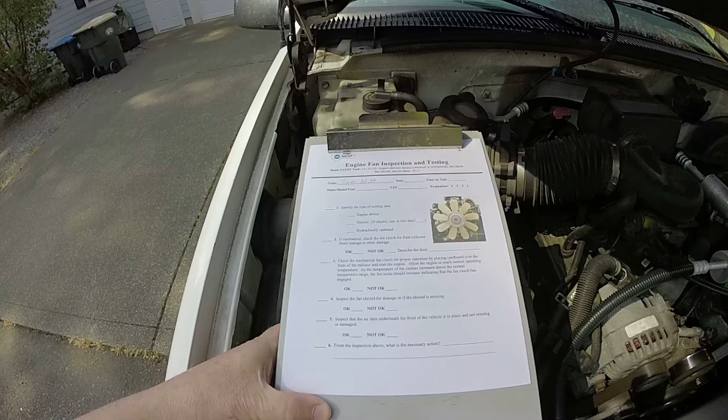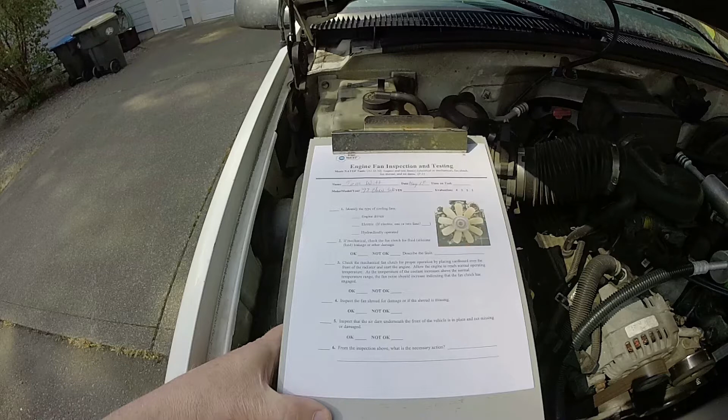Okay, this is inspecting the cooling fan, and this is the worksheet that I've put up on Canvas for you to download. So we're going to start just by filling this out. We're going to be looking at my POS vehicle here, and today's date is May 1st. Can't believe we're in May already. All right, so this is going to be a 1997 Chev Suburban. I'm not going to worry about putting the VIN number down. And the evaluation is for, usually when I grade these things, that's the evaluation marks that I use, but we're not going to worry about that.

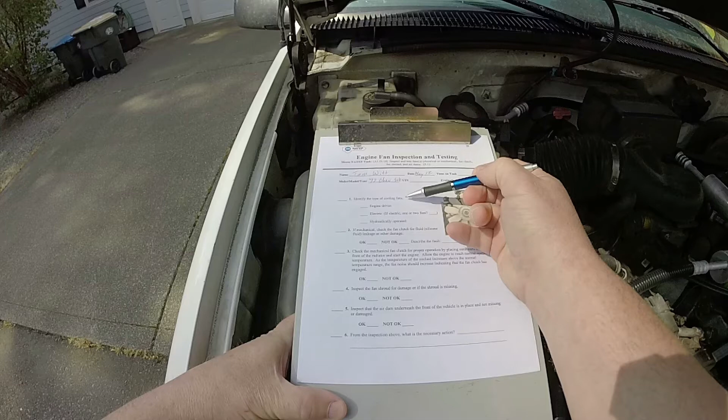So basically what we're going to do is go through and identify all 6 of these items. First, we need to identify what type of cooling fan we have, and if it's mechanical, whether or not the clutch works, and check the mechanical fan for proper operation by placing cardboard over the front of the radiator, starting the engine, and allowing it to reach operating temperature. As the temperature increases, the fan noise should increase as well. So we're going to do that along the way here.

We're also going to inspect the cooling fan shroud to see if there's anything that needs to be attended to, and then inspect the air dam underneath the vehicle, and also determine from the inspection above if any necessary action needs to take place. So that's kind of the outline of what we're going to do.

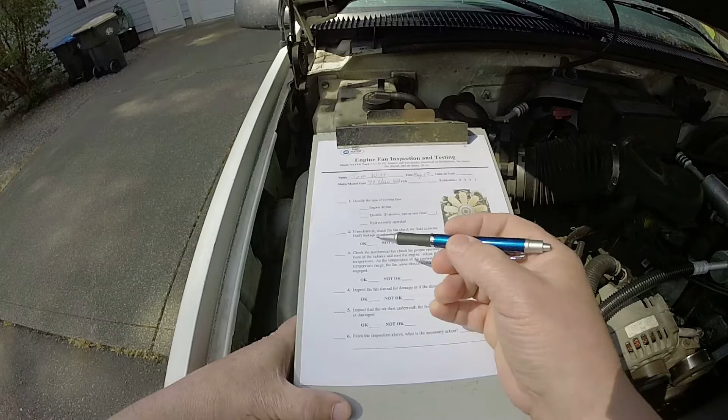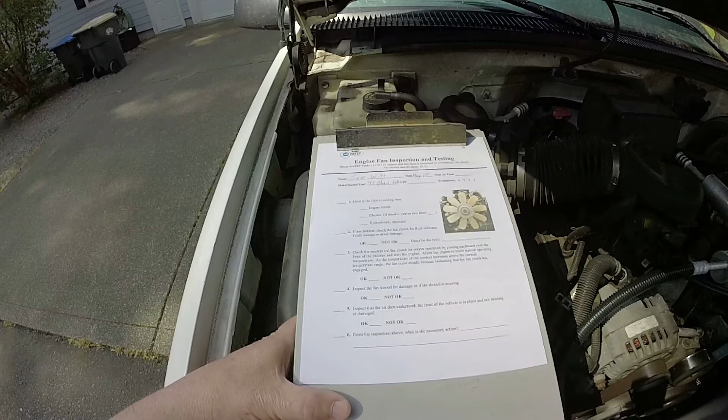Now actually I would put this one down here at the bottom. I'm going to go through and do an inspection on everything first, and then I'll start the vehicle up and make sure that the fan is actually working. So with that said, let's go ahead and take a look at the vehicle.

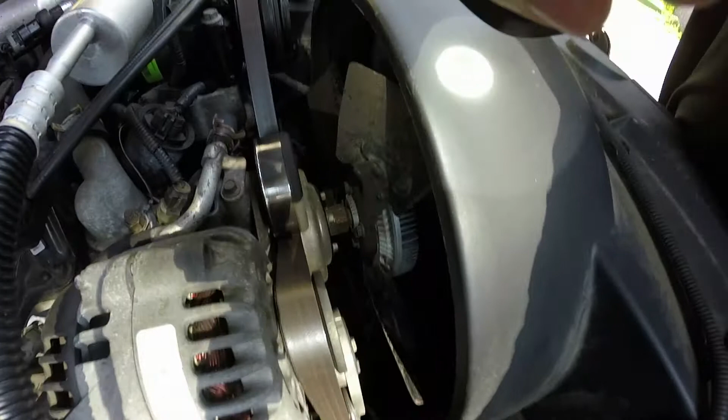Okay, so we're looking at the cooling fan here. If I get my camera adjusted. This is actually a mechanical fan, so it's not driven by electricity, it's driven by the engine itself. Just looking at it right here, I think I showed you on the engine walk-around video, if you did that one, the engine component location video. This silver thing right here that I've got my flashlight pointing to, that is your clutch for the fan. Now, before you start the vehicle up, the engine's cold.

One of the things that you should check is to make sure that the fan actually turns. Now, it shouldn't spin free. If you notice, I spin it like that and it only spins a little bit - that's the way it's supposed to be. Now, if you take the fan and spin it and it just spins freely, that's a worn out clutch. So this one here is actually working the way it's supposed to, at least right now while it's cold.

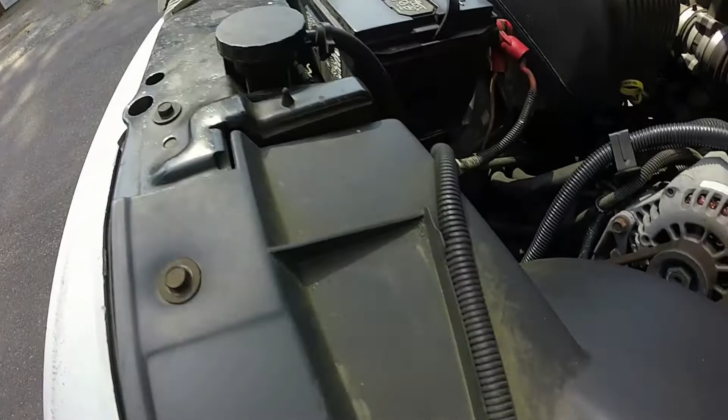We're also going to take a look at the fan shroud. You can see the camera shadow there. We're going to look at the fan shroud, and I don't see any cracks or anything. All the screws are still there in the fan shroud, so everything looks good as far as this fan shroud goes.

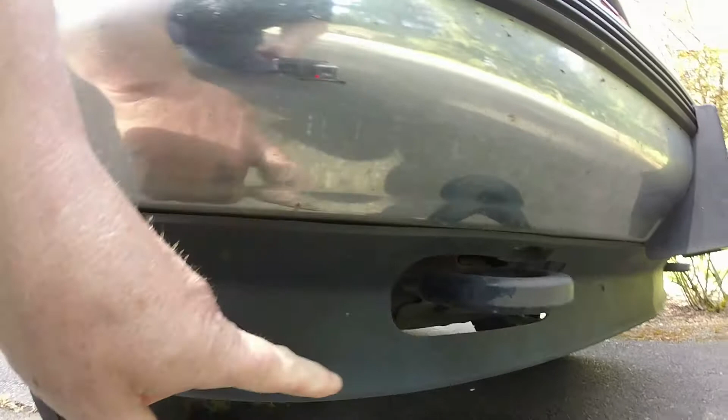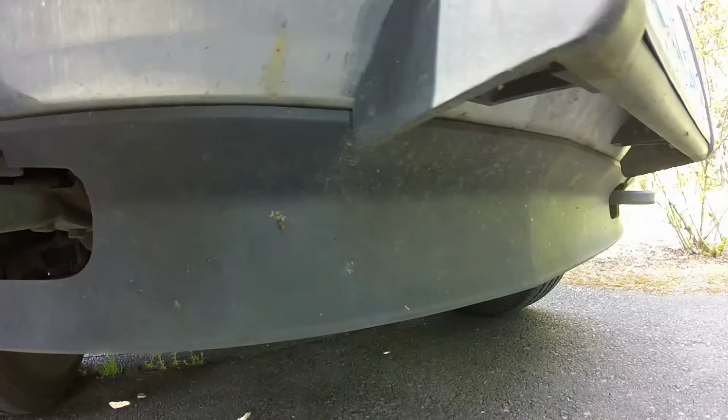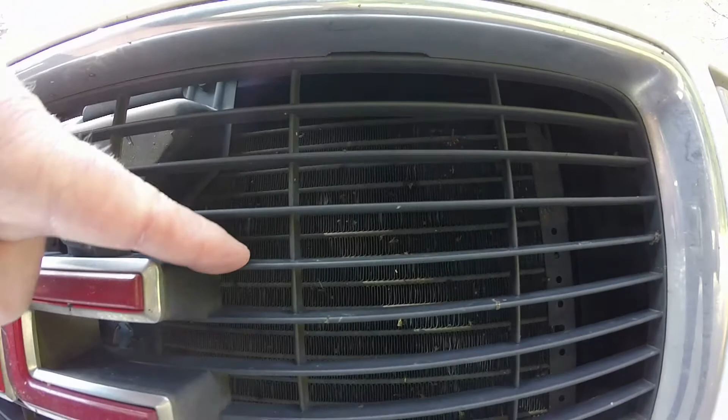Next thing we're going to do is look at the air dam. The air dam is this little guy right here, and on this Suburban, the air dam that's all it is. There are some vehicles that actually have a little more intricate air dam, but as we walk along here, we're going to make sure that it's all there and it's not broken. What that does is it helps channel the air into the radiator. If you look right up here through the grill, you can see the air conditioning condenser, and the radiator is just behind that. The air dam helps channel the air up through so that it goes where it's supposed to on the radiator.

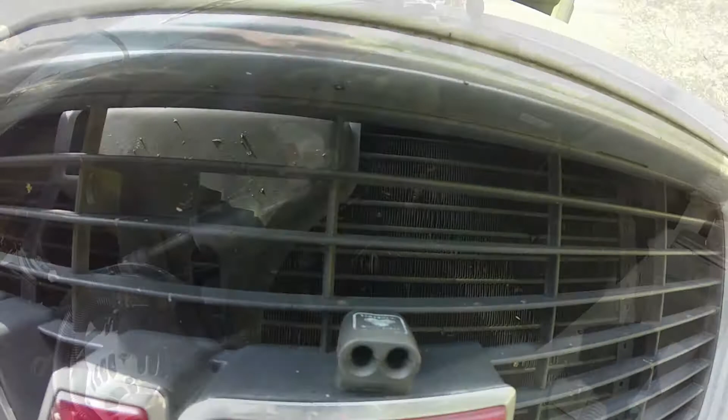I've got the engine started, and we're going to bring it up to operating temperature. So it's still pretty cold right now.

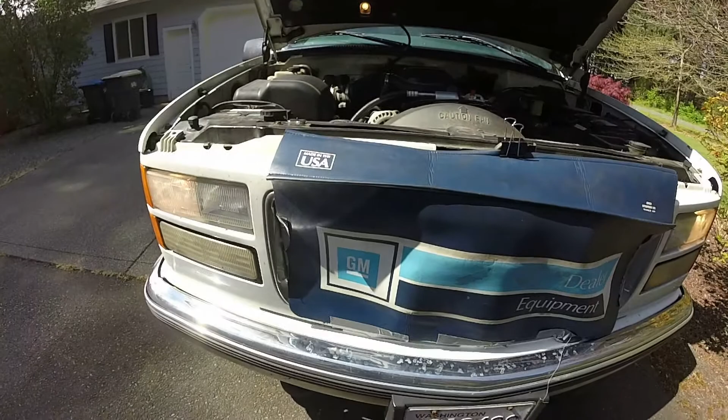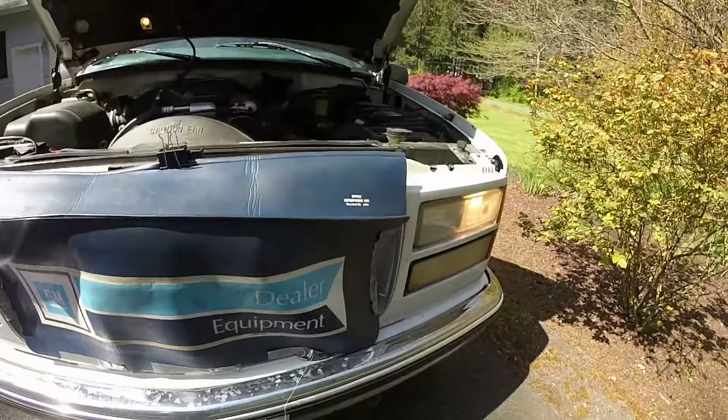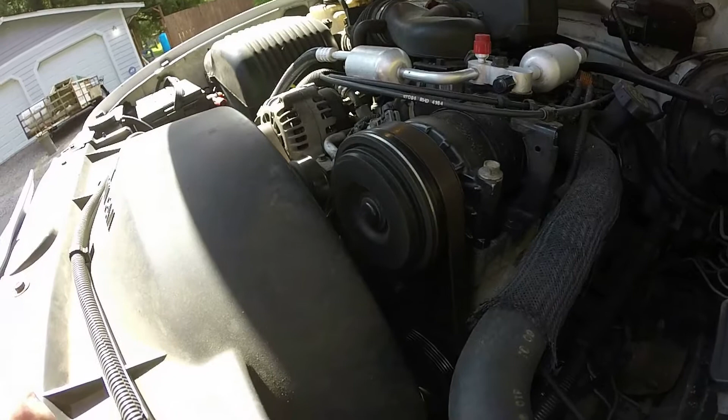What I've done is I've blocked off the radiator. I forgot to mention at the beginning of the video, you may need a piece of cardboard or cloth or something like this. I just used an old fender cover and some 100-mile-an-hour duct tape. If you are duct taping stuff to your vehicle, you might want to not use the real sticky stuff because you don't want to stick it to the paint and have problems trying to get the adhesive off.

So we're just going to let the vehicle warm up here in a minute, and then I'll show you how to check the fan.

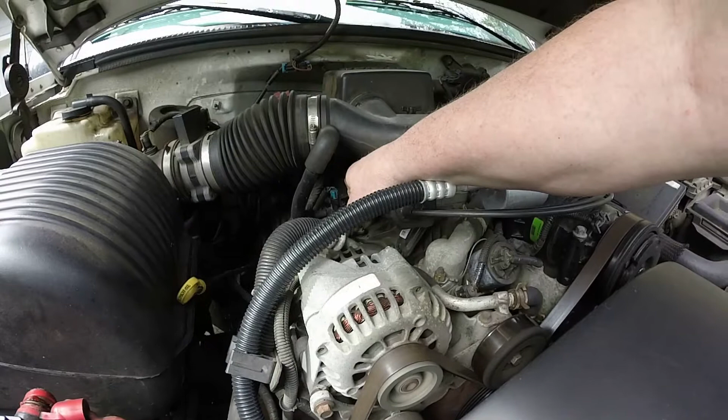One of the things that I do to help the engine warm up a little faster is just bring it up to about 2,500 RPM or so and hold it there. So what I'm doing is I'm just lifting up on the throttle plate and holding it there.

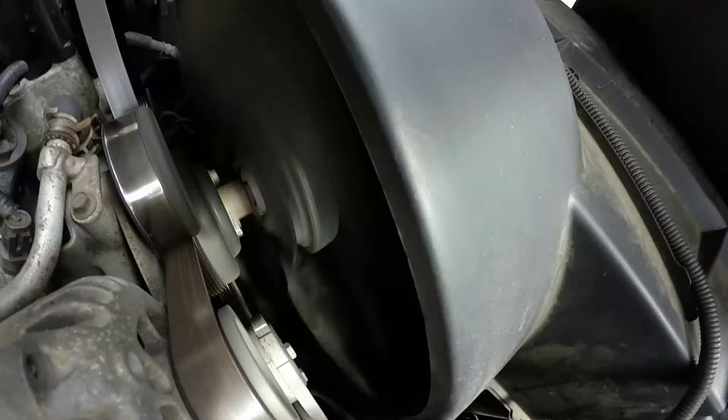This engine's been running for about 10 minutes now, and it feels like it's at full operating temperature. What you should be feeling is you should hear a change in the fan. So if we look at the fan down here, you should see or hear a change in the way the fan kind of moves air.

So what I'm going to do now is shut the vehicle off, and we're going to test the fan to see if it's stiffened up at all.

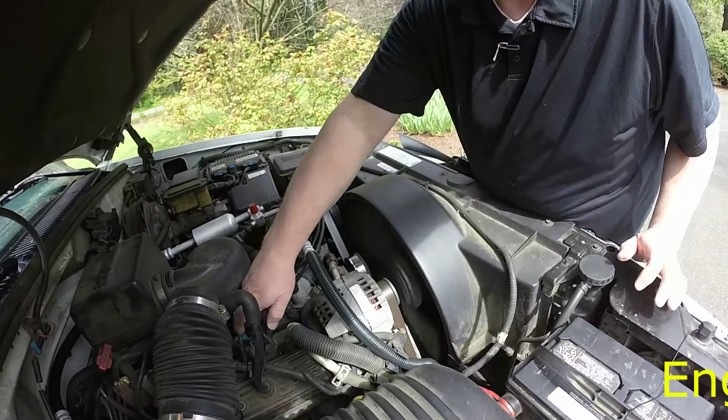Sometimes when you rev the engine up like this, you can hear a change in the fan. I don't know whether you can hear that on the camera or not, but when I first revved it up, it sounded like a big roar, and you can feel a lot more hot air coming up through here. So this fan is working.

Sometimes when you shut the vehicle off after running it at operating temperature, the fan doesn't want to turn very well. This one here is taking a little bit of effort to just move it that much. It's not completely locked up, but it's working. So anyway, that's basically how you check a fan.

The other thing to check is if you have an electric fan, do the same thing. You block off the front of the radiator and then run the vehicle and watch for the fan to come on, at whatever the operating temperature is. It'll come on low speed a lot of times, then kick on to high speed, then shut back off again once the temperature goes down a little bit.

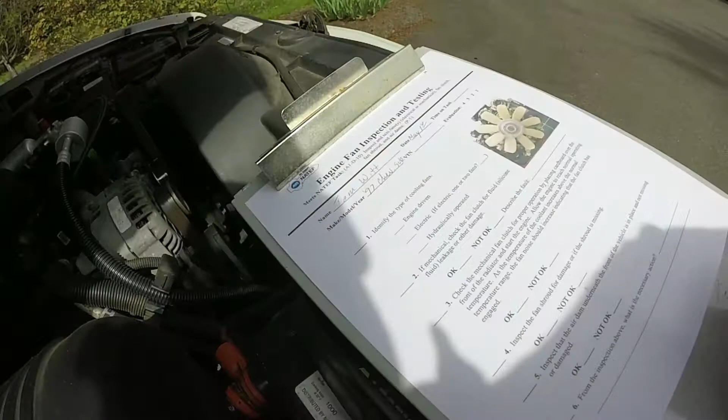To finish this video, all we have to do is finish up the paperwork. So we have an engine-driven fan, not electric, not hydraulic operated. Mechanical clutch is fluid or silicone, and is there any leakage or damage? It's okay, there's no leakage or damage. You would describe any kind of fault there.

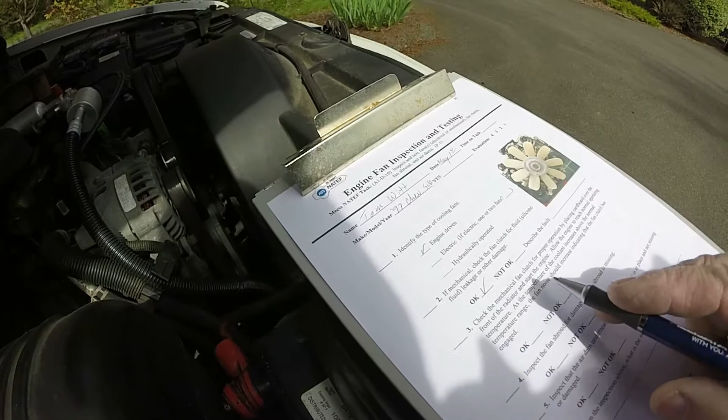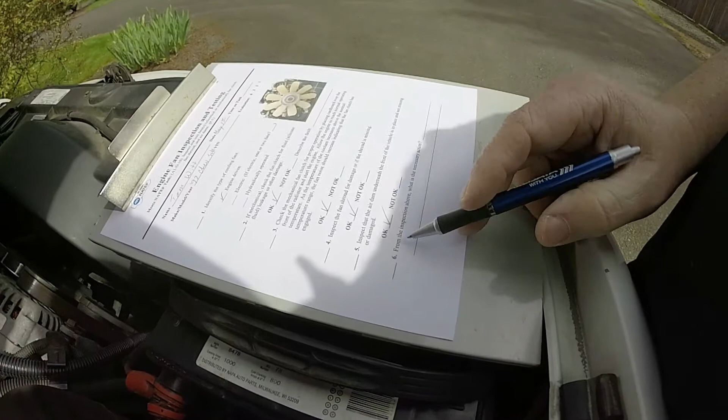And then we performed our operating test, and it was okay. We checked the fan shroud, it was okay. We checked the air dam, it was okay. And from the above inspection, what necessary action needs to be taken? I'm just going to write none.

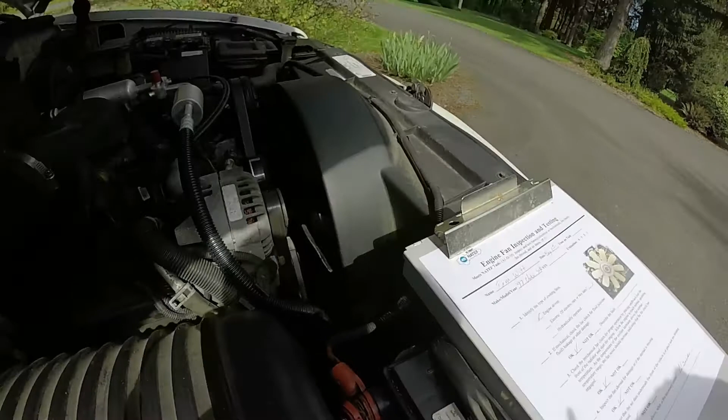And that's it. So pretty easy, straightforward, gives you an opportunity to check out your vehicle, see what kind of system you have on there, and that concludes this.